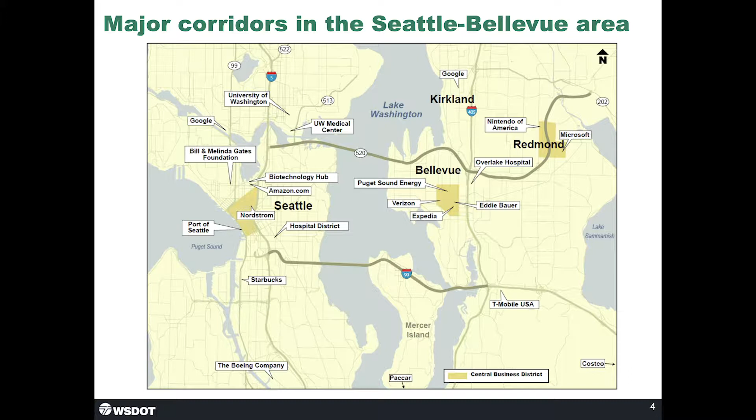This is what we affectionately refer to as the box in the city of Seattle. You've got I-5 running through Seattle north-south, and just to the west of I-5 is SR 99, the Alaskan Way Viaduct.

East of Lake Washington, you've got Interstate 405, which runs through Bellevue. It's right adjacent to Redmond, and those are booming communities on the east side of the lake. We have two crossings of Lake Washington, I-90 and SR 520, and both are key commuter and freight routes. I-90 is an important freight route.

The idea for Freeway Park came from the community. The community wanted to do something different after the highway was built in the 50s. So in the 60s, the idea came up for a lid or a freeway park, and eventually it went to a vote. The bonds were approved by the voters, and in 1976, Freeway Park was constructed.

After a while, the city of Seattle agreed to build the convention center, and it was built adjacent to Freeway Park. As development went on, the city of Seattle looked at expanding the convention center, and as part of that expansion, they're studying other lids that go over I-5.

It's been a really collaborative process. Part of the work to expand the convention center includes a feasibility study, and that group is looking at what they're trying to achieve with lids over I-5. It's just beginning, and it's been part of an exciting process in Seattle.

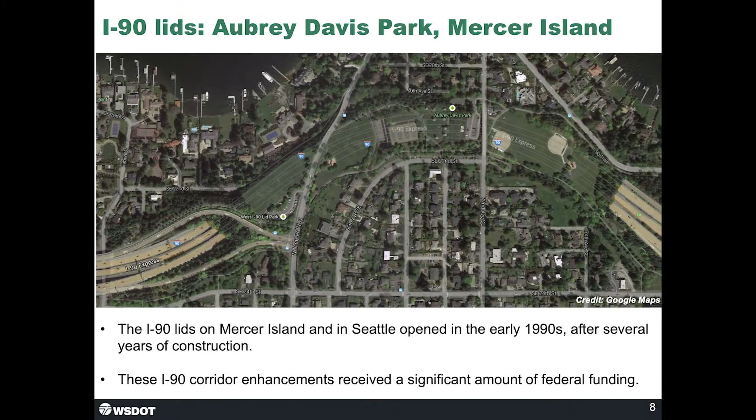So what you see here today is a lid on Mercer Island, and it's called Aubrey Davis Park. Mr. Davis was an important civic leader at the time and throughout much of his life. He was important in securing funding for downtown Seattle's bus tunnel.

This lid in particular is 2,300 feet long and includes a lot of recreational facilities on it. If you were walking on the lid today, you would see baseball fields, open space. There's bicycle and pedestrian connections across it, and it is well utilized and loved by the community there.

This lid also features community connections, pathways, and park-like features and community gathering spaces. The tunnel itself is 3,400 feet long, about 11 football fields. The lid itself is 1,900 feet. So if you were to walk on this lid, you'll see landscaping areas. There's a very key bicycle pedestrian path across Lake Washington that connects into this lid.

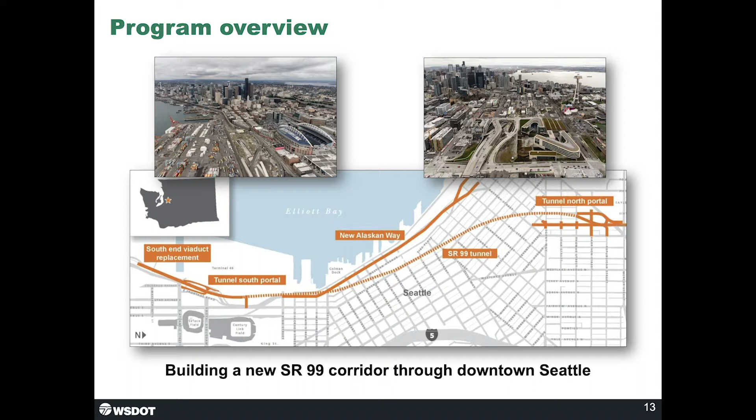It isn't just a tunnel, though. The Alaskan Way Viaduct program is actually 30 separate projects, 25 of which are complete today. The entire program that's funded by the Washington State DOT is $3.3 billion, although our partners also fund portions of the tunnel and the program.

A few fun facts: the tunnel is free to drive through today, but it will be tolled as early as August at the end of the summer. Part of the toll, in part, is to pay for the maintenance and operations for the tunnel.

The tunnel is about 1.7 miles long. At its deepest, it's 211 feet underground, and its outside diameter is 56 feet, which at the time it was constructed was the largest deep bore tunnel in the world.

Community engagement on this program was very involved. There were many, many stakeholders that we worked with, over 14 agencies, our transit providers, King County Metro, Sound Transit. Access to the port is right adjacent to the Alaskan Way Viaduct, and so interactions with the port were key.

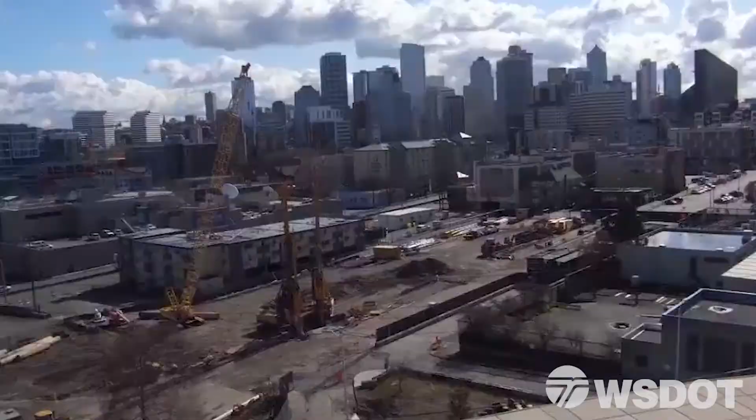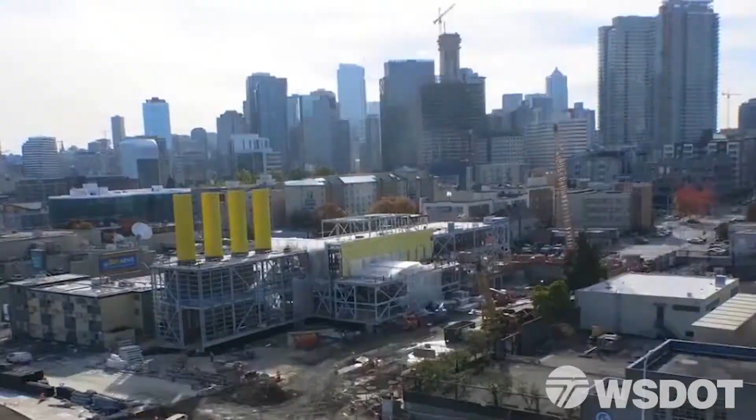What you'll see here is at the north end of the program, this is the North Operations Building getting constructed. This is several years of construction. So the tunnel comes out of the portal. You'll see the connection to the local street, and those 4 yellow stacks are the ventilation and operations building, sort of the heart of the building.

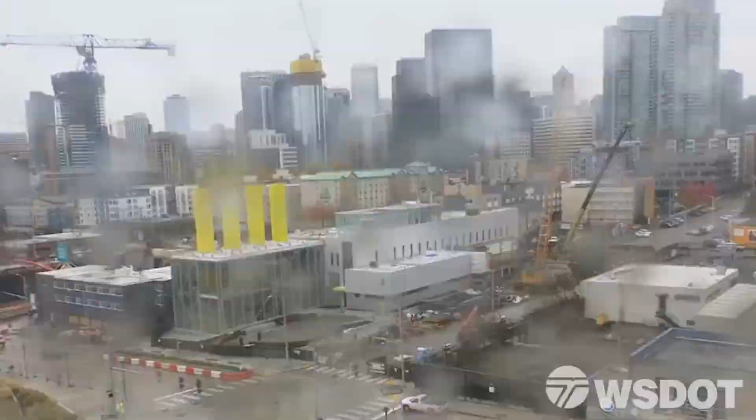I think you can also see this is South Lake Union area. Many buildings going up, a lot of construction going on. So that is Alaskan Way Viaduct.

Over 100,000 people came to celebrate. We had a run where you could experience the tunnel and the old Alaskan Way Viaduct. There was a bike ride on Sunday morning. During the events, we had science, technology, engineering, math, or STEM events out there. There was music that the City of Seattle sponsored and food trucks.

I think the hardest part of this day was at the end of the weekend, the public really had to say goodbye to a structure they either loved or hated. And so that was their moment to do so.

It isn't possible to do a program like the Alaskan Way Viaduct without partners. The Port of Seattle was completely engaged and provided funding for some of the work. FHWA provided some funding, but also was key to keeping things moving. King County Metro and Sound Transit were important partners for us to keep the public moving.

While we were doing construction, the City of Seattle and WSDOT successfully collaborated throughout this process. In fact, when we connected the surface streets to the new tunnel, we had to close both the viaduct and the tunnel to make those connections in January for about 3 weeks. It would not have been possible without all the agencies working collectively to solve problems and move the public during a definite pinch in travel. So partnerships are key.

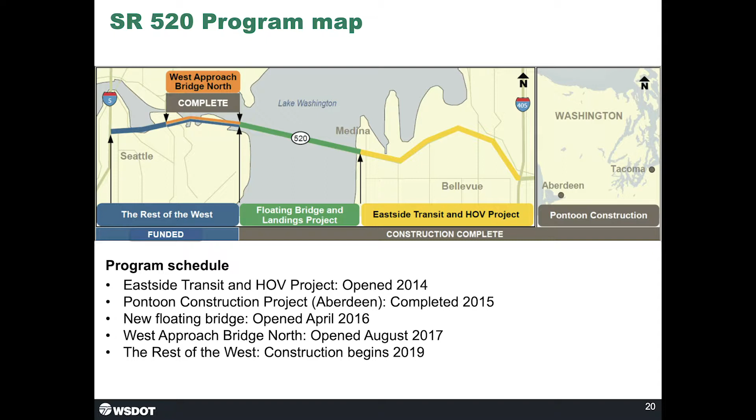So the 520 program, as you see on this map, starts in Seattle on the west side and extends out. Most of the work is between Seattle and Bellevue at 405. Like most projects this size, we broke it up into separate projects. The East Side Transit and HOV project was constructed and opened in 2014. We built the pontoons for the floating bridge in Aberdeen and Tacoma and floated them in and put them on the lake, and we opened the new floating bridge in 2016. Then we built the fixed structure from the floating bridge to Seattle, and we opened that just last year.

Now I'm going to talk a little bit about our lids, but first our outreach. I know we're talking about the Rose Quarter project, but just to give you a scale for the outreach on this project, community engagement on the 520 program actually began in the late 1990s. We talked about going around Lake Washington, under Lake Washington, and what modes we would have. We even learned about magnetic levitation, so maybe that'll come back again.

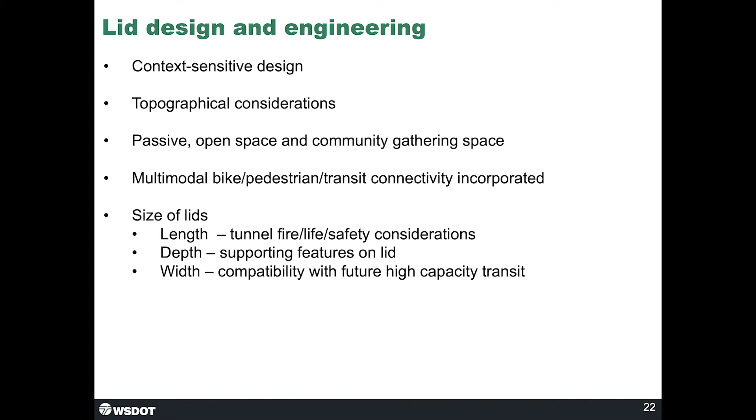While the 520 corridor was getting wider to accommodate HOV lanes, the communities knew that at some point light rail may go through this corridor, and they didn't want our lids to preclude that from happening. So we designed them with forward compatibility should light rail come.

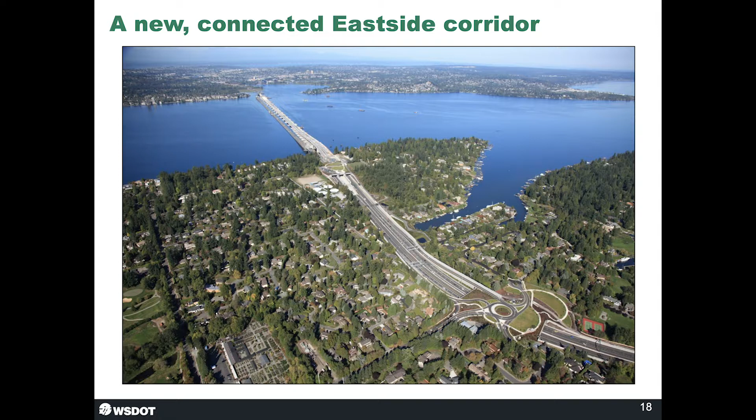520 is underneath the lid. We have a transit stop here, with elevators and stairs to go down to it. We call this little section the kiss and ride, where you can drive through in your car. It was a classic use at this site—kids get out, go down, catch the bus, and go off to school, or you drop your significant other off to ride the bus.

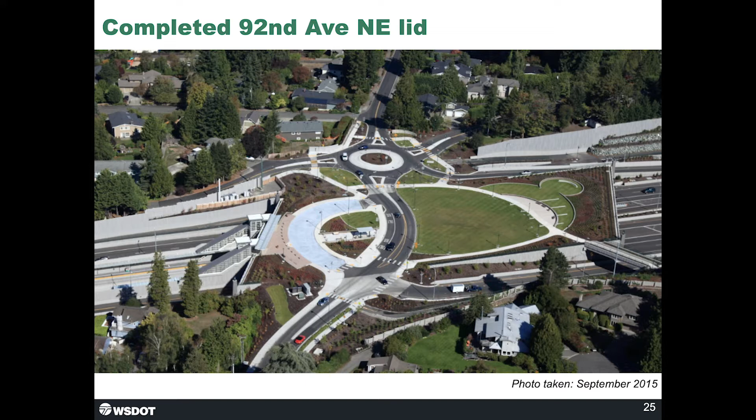Here, you can't hardly see it in this photo, but that's our regional bicycle pedestrian path, which goes east-west across the lake, and these paths connect to the local trail that goes through the east side. So the lid incorporated the multimodal features, open space, and bicycle pedestrian features the community desired, while accommodating transit down below.

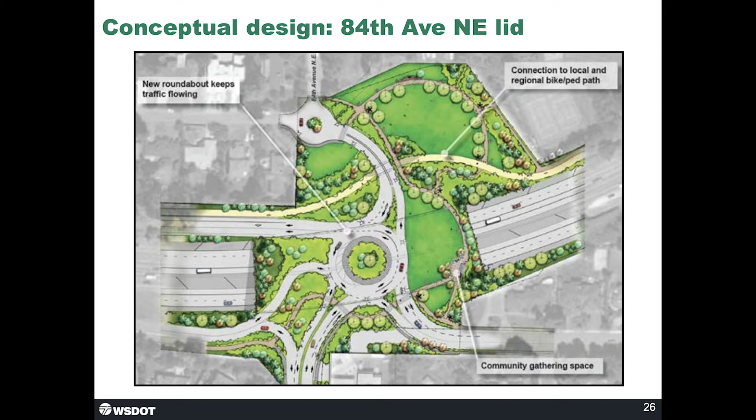If you travel further west, this is 84th. This is the only lid on the east side that didn't have a transit stop as part of it. This is as it was designed during construction, and this is as constructed.

You can see the freeway down below, and this is 84th, which goes across. What they wanted was a connection to their park, over here. Our regional trail goes east-west across, and we have north-south local bicycle pedestrian features. After we constructed it, the local community is now working on adding another bicycle pedestrian trail along their local system on 84th, and we're helping facilitate that within our right-of-way.

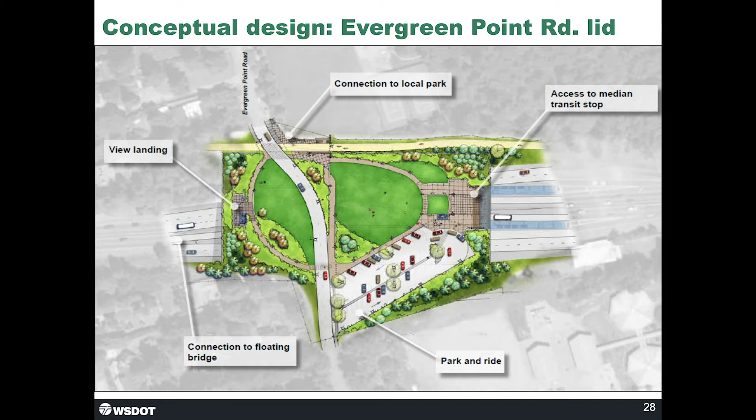This is the furthest west lid on the east side, Evergreen Point Road in Medina. Again, it has a transit feature as part of it. This community struggled with the park and ride lot—they just couldn't say goodbye to it—so it's the same size as it was before we constructed it. It's a modest 50-stall park and ride lot.

There's a local trail system that goes north-south, and this is the outlook. When you visit the I-90 or the 520 lid, we call that the money shot because it's actually pretty beautiful.

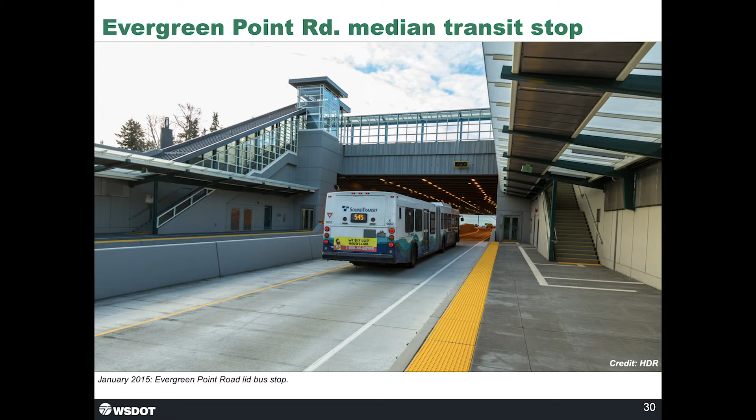This is actually one of the flyer stops we built, and we designed it in close partnership with Sound Transit, our transit agency, and King County Metro. The 520 corridor is an important commuter corridor, and in the future it's either going to be a high-capacity bus rapid transit corridor or a light rail corridor—that decision is yet to be made. What we didn't want was to create barriers to that design in the future, so we designed to accommodate those possibilities.

Now I'm going to travel a bit across the lake.

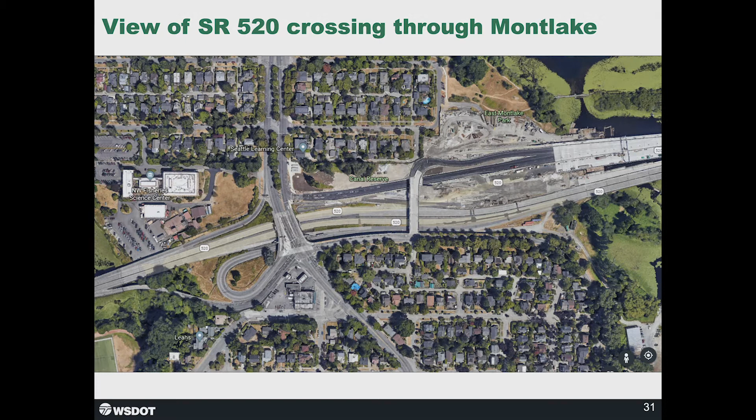This is the City of Seattle, Montlake interchange area. SR 520 runs east-west, and this is SR 513, or Montlake Boulevard. Before we started, 520 carried 100,000 trips a day, and Montlake Boulevard carries about 60,000 trips a day, so it's a very congested area.

The neighborhood was split by 520 when it was constructed, a historic neighborhood divided in the 1960s. Off the map is Lake Washington, which carries several salmon habitats, including endangered species we had to deal with. It's a sensitive shoreline we needed to protect, along with water quality issues, historic neighborhoods, and cultural resource issues for several tribes in the area that we needed to respect.

Just off the map is the University of Washington, which includes several hospital and recreational facilities. While we were doing construction, Sound Transit built the University Link Station, a key part of the new transit system, so our 520 corridor needed to be designed in conjunction with what Sound Transit was doing there.

After much consultation with the neighborhoods, this is the design of the new lidded area and freeway for the 520 Montlake area. If you look in our environmental document, this lid would have spanned all the way from here to here.

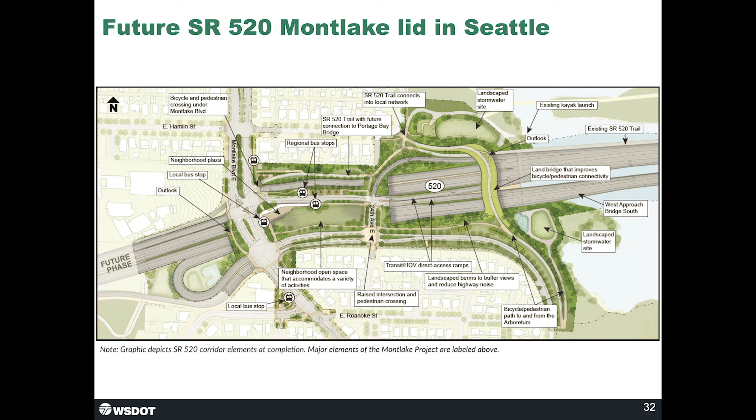But in consultation with the neighborhood, we found that as you looked at what you wanted the lid to accomplish, which was connecting neighborhoods, because of the topography you ended up with a 30 to 40 foot wall on the north side, and you couldn't actually walk across the lid. You ended up with dead space that we didn't think would be very useful, and it wasn't encouraging the activity we wanted.

So in working with the neighborhood, what they really wanted was to connect across the lid. This is the connection we kept: a 70-foot wide land bridge for bicycles and pedestrians only, including a lookout so people can enjoy the water view. They can walk across without having to see the freeway as they go. That was its function.

The lid here is about 800 feet long. On the lid, HOV ramps come up on the inside in their own separate lanes. We have regional transit stops here, which connect to the local transit stops here, and then we have our open space right along here.

This was done in consultation with the neighborhoods after our environmental document was complete, but we continued the conversations. This contract has been let and awarded, and construction will begin this summer.

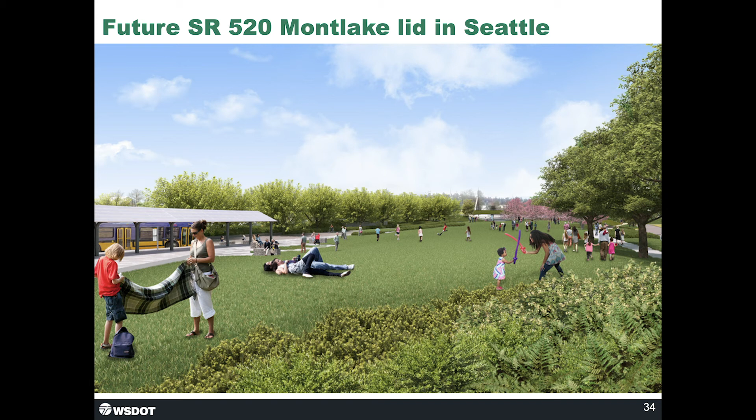If you were to walk on the lid as we envision it, here's the transit stop with a covered walkway for the whole area, designed in consultation with the transit agencies, who will need to maintain it, so we made sure they understood what was going to be constructed. Here's the open space, and we're hoping the transit area becomes a place people want to gather, go to, and enjoy, with the Seattle Parks Department working with us to make sure they can maintain it.

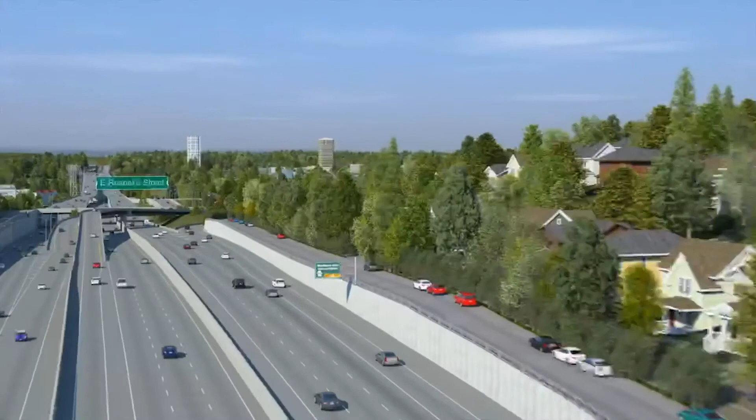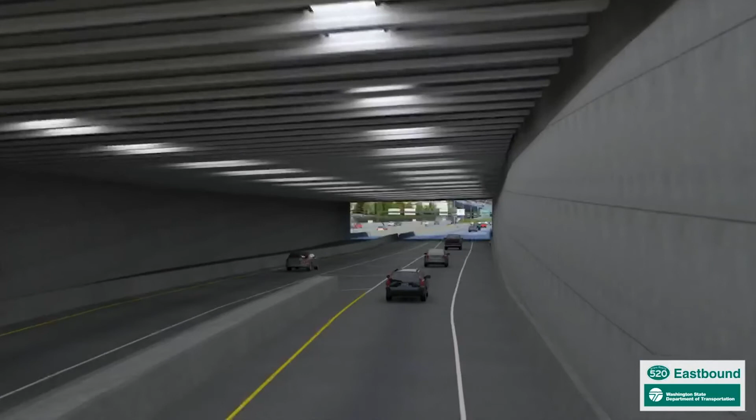This is an animation of the section of highway we haven't constructed yet. You're flying down, going on I-5 northbound, and you exit I-5 to travel eastbound on 520. You do the turn and go under the proposed lid between the local streets of 10th and Delmar, and this lid won't be flat like the other lids, it'll step down with the topography, and here you're exiting to Portage Bay.

This is flying over the lid, which will have bicycle and pedestrian features on it, and this is the Portage Bay Bridge, where we have further consultation to do. You'll see it will be between yacht clubs on the left and sensitive environmental areas on the right, and as you get closer, you can see the new Montlake lid in the future and the off-ramp to Montlake Boulevard.

And that's 520. This is my last slide for the night.

520 included a bicycle pedestrian corridor where there never was one before. I like to say bikes could cross 520, but they paid a $25 toll to do it. When we opened the bicycle pedestrian path, it was a cold, frigid day in December, and thousands of people showed up to ride across it. We put in a bike counter on the trail, and since we opened it, over 320,000 people have used it. I predict it'll be the most popular recreational commuter corridor in Washington State, so I'm pretty proud of that.